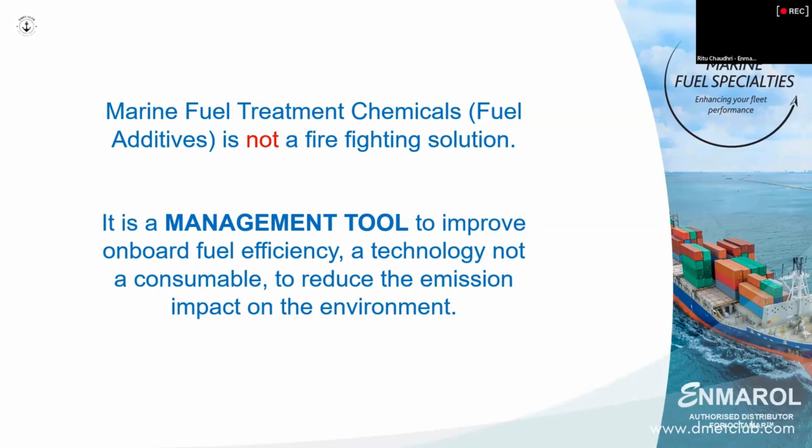Now today we are going to be speaking very clearly about VLSFO only. Each bunker, you can actually make a separate presentation on. And in VLSFO today, we also have the concept of B30. B30 means up to 30% of biofuels can be added in VLSFO. So whether you're using VLSFO or B30, the product will cover the issues.

Now, like all bunkers, there are only two issues each bunker has: stability and combustion. So when we started using VLSFO, please see the VLSFO versus the HFO. In HFO, whenever we had a stability issue, it was always asphaltene sludge. Asphaltene sludge means heavy molecule sludge.

But in VLSFO, when you have sludge, you need to identify it, and that is the aim I'm going to try to achieve in this presentation. The aim is: is the sludge asphaltene, that is heavy molecule, or is the sludge distillate from the middle distillate, because VLSFO has a very high blend of middle distillate, or is the sludge because of waxing? Your chief engineer must be able to identify this, because each of the three has a different source of addressing. And if the chief engineer understands this, he will actually handle 80% of his stability issue on board.

In VLSFO, we're going to discuss stability - that is asphaltene stability, distillate stability, waxes - and we're going to discuss combustion. If your combustion is good, you will save the environment.

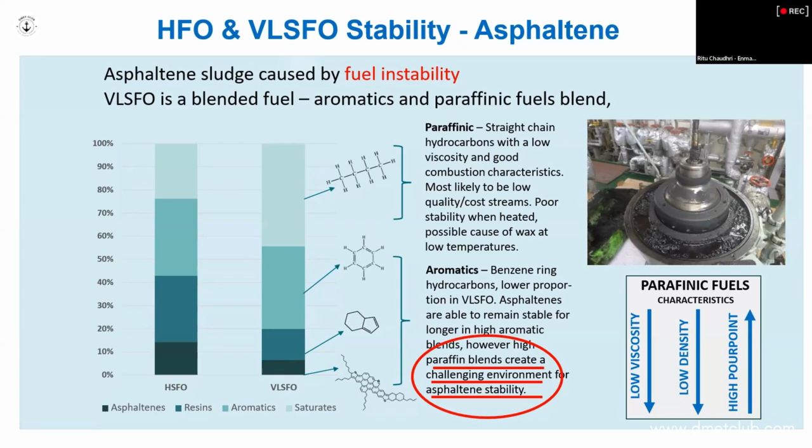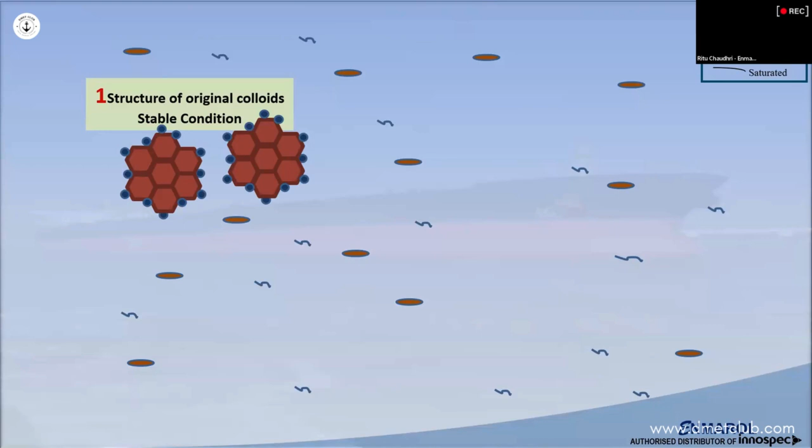So now we go straight to the asphaltenes. What are asphaltenes? Asphaltenes are heavy molecules that are floating around in the fuel. If these asphaltenes are basically polar happy, that means when they see each other, they have a tendency to come together and bounce off.

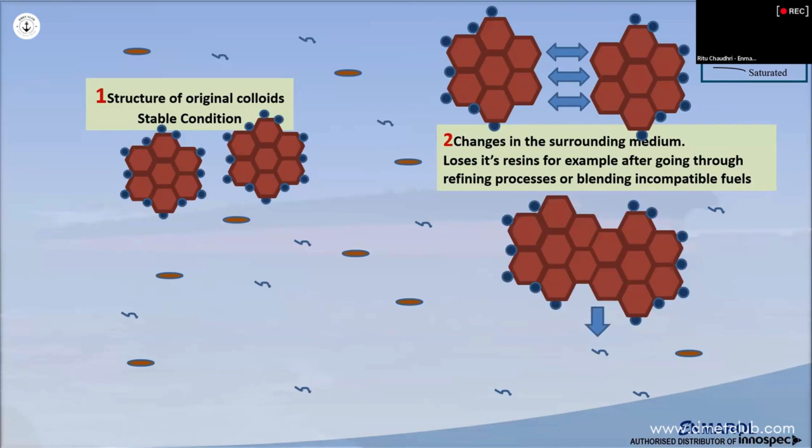But in VLSFO, when we have a higher blend of middle distillates, or the refinery has done excessive processing of the heavy molecules blended in your VLSFO, when they see each other they come together but they don't bounce off. They join, and keep joining, forming larger blobs of things. They sink to the bottom, and that is what your tank bottom sludge is.

So basically, the concept here is that the asphaltene sludge in your VLSFO is not bad fuel. It's just these heavy molecules that have coagulated or clumped together, and because of gravity, they've sunk to the bottom. What does an additive do? Here, the additive plays a very vital role. Irrespective of whether your asphaltene sludge is 1 year old, 1 week old, or even 2 years old, you can treat it. That concept must be very clear - asphaltene sludge is not bad fuel, and it can be treated irrespective of its age.

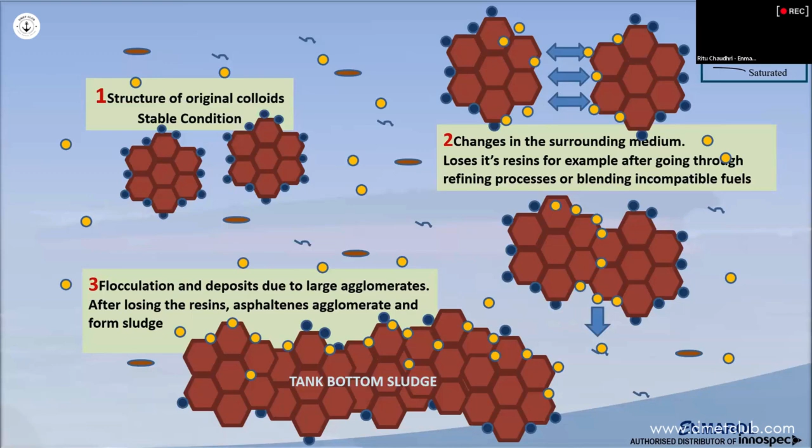So you put the additive in - those yellow dots are the additive. It will mimic and penetrate the sludges, and it will separate them. So asphaltene sludge can be treated irrespective of the age, and the fuel can be burned safely.

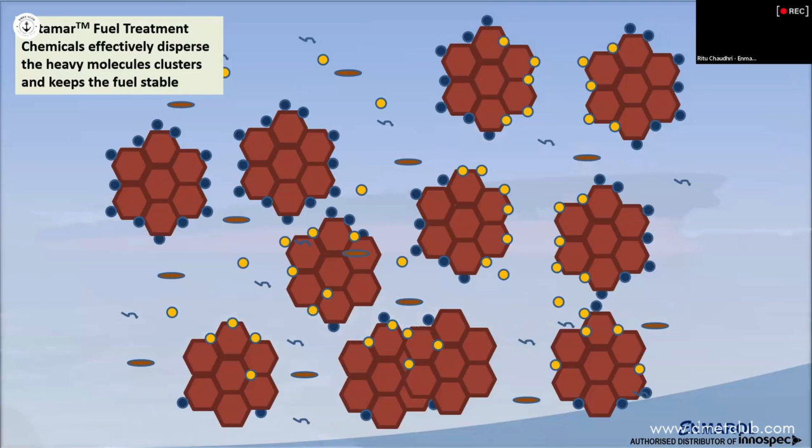Now, how do I know that my asphaltenes are stable? There's a test called RSN, or separability number, which tells you whether your asphaltenes are stable. This is a very important test, and most of our customers in India, as a practice, do it for all their bunkers. It is not part of your ISO 8217, so you have to request for this test to be done.

This test gives you a number, and this number has to be less than 5. If this number is less than 5, that tells you that my asphaltenes are stable. So if you're having sludge in your purifier and your RSN is stable, you know that is not asphaltene sludge. It may be distillate or it may be waxes.

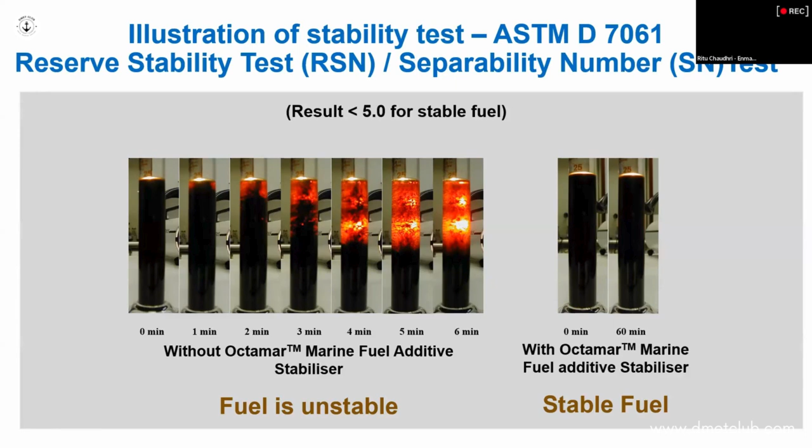Because if your RSN is, say, 3, and you say okay, it's below 5 so it's stable, but if you keep your fuel for 1 month, 2 months, 2 weeks, 3 weeks, 5 weeks, that RSN will keep increasing. Your 3 will become 3.2, 3.5, 4. So the question is that after 2 months you may get sludge. So please, we tell people, asphaltene sludge, asphaltene molecules can be kept stable and treated irrespective, and burned safely.

Please see this. We have a VLSFO batch over here which has got a 10.8 RSN. That means totally unstable fuel. And you can see the other one, you got 3.95. Now the 3.95 over a period of 2, 3, 4, 5 weeks will cross 5.

So you don't need to wait for that instability to come. Treat it at the time of taking bunker. Please see both the things, the beakers are given. You'll notice that the second beaker, after treating, how smooth. You can see the RSN have come down drastically and the fuel has been stable. This is the power of a good additive.

So if your fuel is stable, remember one thing, it will burn better. Why will it burn better? Unstable fuel or heavy molecules tend to clog the small nozzles, your injector tips get clogged by these heavy molecule clogs, and your atomization gets skewed. So if you've got a well stabilized, stable dispersed fuel, you'll notice that your injectors are not getting clogged and the atomization is very good.

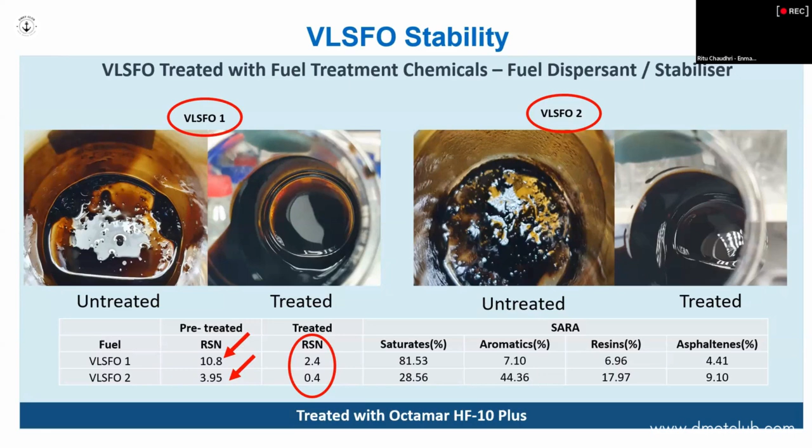So this is the power. It will keep the fuel stable and ensure that the atomization is also good, and that is how your combustion will also improve. Good atomization directly impacts, directly relates to good combustion.

The other thing we've noticed is people say, I let the last 5% of bunker remain in my tank because you cannot drain out all your storage tanks.

So if your chief engineer is taking fuel on board, he must ensure there's not more than 30 CST difference between the 5% tank bottom bunker and the new bunker. If he has more than that, there's a good chance that 5% tank bottom may create instability in the new fresh stable fuel. So don't wait for instability, treat the bunker upfront.

Another thing we noticed is low viscosity. We've noticed that low viscosity VLSFO, meaning anything below 80 CST, has created instability. This is very important. If your bunker report says your viscosity is below 80 CST, there's a high possibility your fuel will become unstable very soon. So please keep this in mind. Below 80 is a very good marker we've concluded on over the last 4 years. Below 80, please get the RSN done, or ensure that you've treated the fuel.

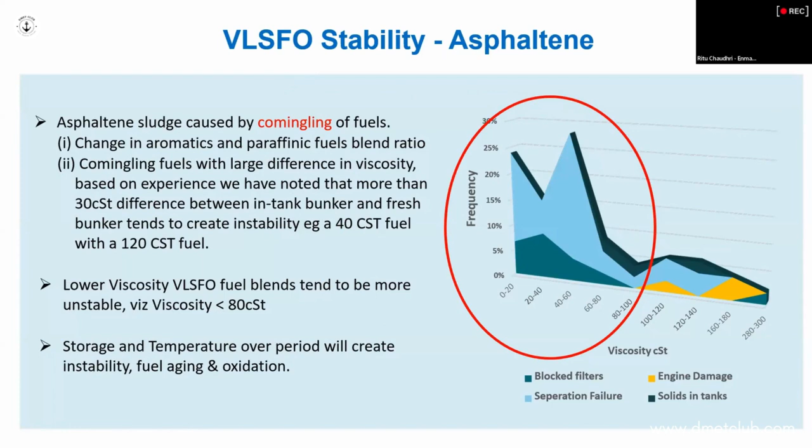The other thing we noticed is even low density, because paraffins have low viscosity and low density. So even if your density is below 940, you will have an instability issue and your fuel will turn unstable. These are very good markers: density below 940 and viscosity below 80 of VLSFO will give you a situation of fuel instability.

So going forward in VLSFO stability, please look at the commingling not being more than 30 CST, and the viscosity not below 80. Unfortunately this appears in 80% of the bunkers people are taking today. So you must treat your bunker to ensure she's stable. If she's stable, she'll burn well, she'll not choke the injector, she'll have better atomization and better combustion.

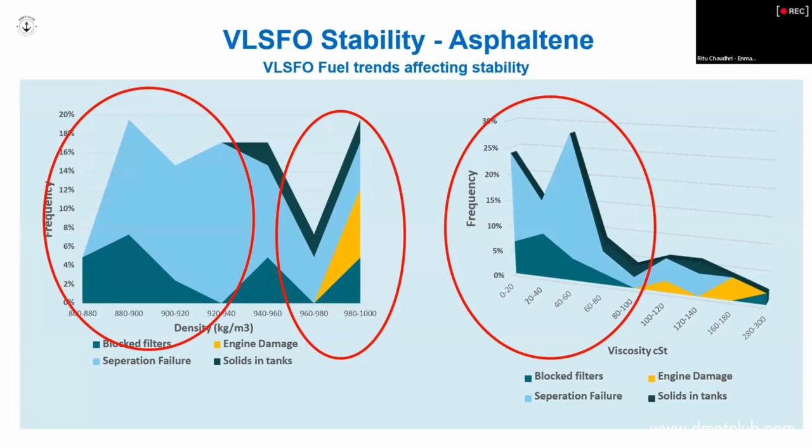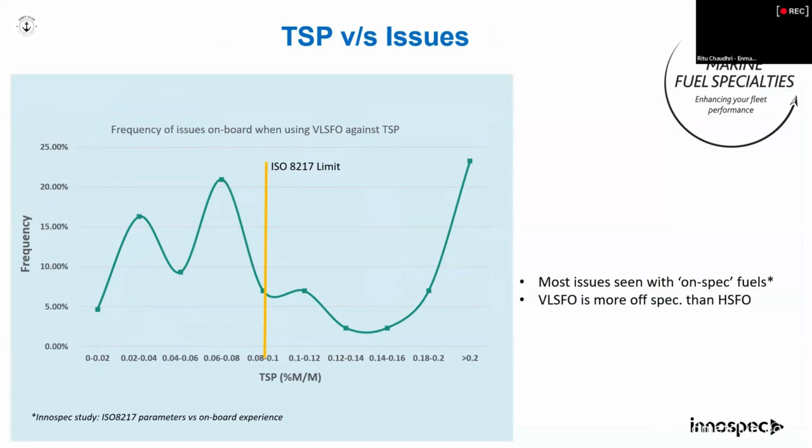So this is on the asphaltene sludge we're talking about. A lot of people say my TSP is fine, so why should I worry? TSP is not a good indicator in VLSFO stability. We've noticed that when the VLSFO is unstable, the TSP is good in those bunkers, but where the TSP is not good, those bunkers are actually stable. So TSP is a very good indicator for HFO, but in VLSFO it turns misleading. So in VLSFO we tell people, look at the viscosity, look at the density, look at the pour point, and please treat. TSP is slightly misleading for VLSFO bunkers.

So we've addressed distillates, we've addressed your asphaltene sludge. Now going to distillate sludge. Distillate sludge is not found in HFO, it's only found in VLSFO. It comes from the middle distillates, the high content of middle distillate in VLSFO. So now let's talk about MGO, which is a pure middle distillate first.

When you took MGO on board, she was light lemon yellow. But over time, meaning over 4-5 weeks, the light lemon yellow would turn dark yellow and then light brown. Basically MGO by character oxidizes in storage. If you kept her for like 6 months, she would turn even very dark brown. Unfortunately, if your MGO is aging, you cannot see it in VLSFO because VLSFO is a dark colored fuel. Because of that, you do not know whether your fresh bunkers have aged distillates or not, and aged distillates are unstable. So in your bunker, your viscosity may be low, your density may be low, your pour point may be high, but your distillate instability is not known.

And there's no test. For asphaltene, we have RSN. For distillate, there's no test. So what do people say?

You know, Ritu, I had fuel, I had sludge, and I heated it because in HFO that's what we used to do. If we had sludge in HFO, we would heat and the sludge would vanish. He said, now when I'm heating, the sludge is getting more and more generated. That is it. If you overheat VLSFO, it agitates the distillates blend and the fuel will age.

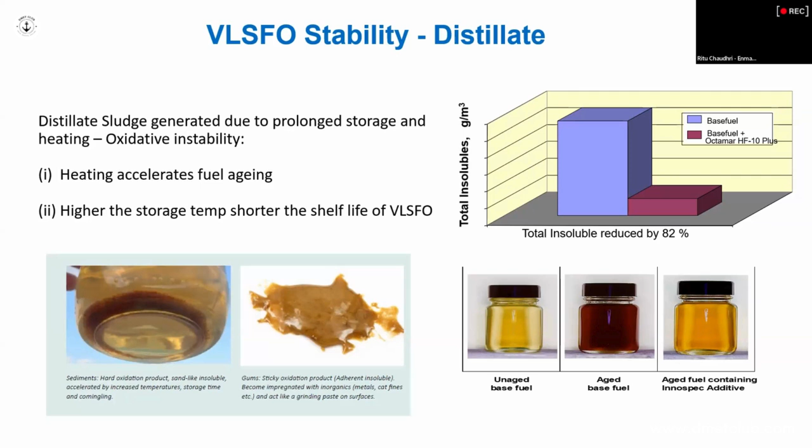So we tell people, please use an additive. Distillate sludge, once created, cannot be treated completely. You will still have clogging in your filters and your purifier. The distillate sludge is something that is to be addressed.

So it is very important to understand overheating is one of the devils that creates instability in your VLSFO, because VLSFO has a large blend of middle distillates, and middle distillates don't like to be heated. We never heat MGO. And the moment you heat middle distillate, it will age. It will create that white gum-like substance, which we can't see because VLSFO is a dark colored fuel, so we cannot see it.

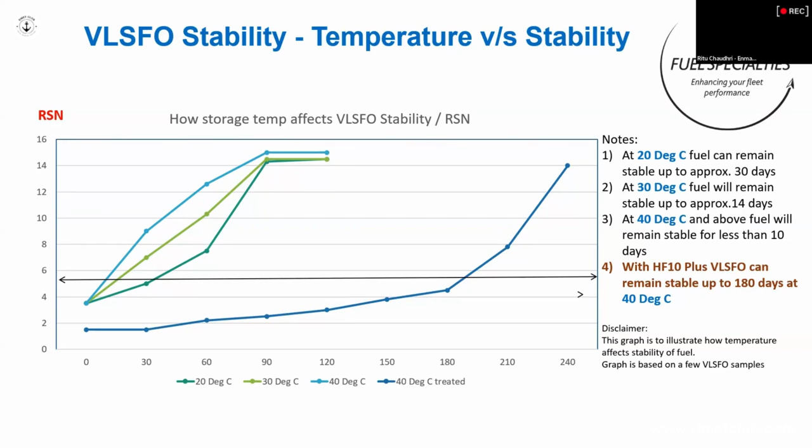So going forward, please ensure that if you have sludge coming out, asphaltene sludge, you can test with RSN. Middle distillate sludge - if you overheat and keep heating the fuel and the sludge is increasing, you know it is distillate sludge. That is the indication of distillate sludge. Keep heating and the sludge increasing, it's distillate sludge.

So in 2020, when VLSFO came out, JSA, Japanese Shipowners' Association, that is where your MOL is coming in, Mr. Mishra - they were very upset that they found VLSFO very unstable compared to HFO, and they approached Class NK saying please find out. So Class NK scanned the entire market, whether it be Nico Yuka, their brotherhood thing, whether it be Adorco, whether it be Drew, whether it be Infinium - they scanned the entire market, and they came to a conclusion that there's only one product in the world that addresses 98% of the instability of VLSFO. This is a test done by them, and this is something they shared. They did this in January 2021.

So they did a very extensive test. And if you go to the Class NK website, only our product appears. They said it is marked.

And the reason our technology is so good is because we are among the top 3 refinery chemical suppliers in the world for fuel treatment. We are very strong. We manufacture, we develop all our products ourselves, we manufacture all our products ourselves, and we sell all our products ourselves. So because we have very deep research, R&D and technology, we were able to give the right product for VLSFO.

And I think we were the first company to launch a VLSFO product in 2019, because a lot of our customers were testing. But this is the power of a good dispersion stabilizer.

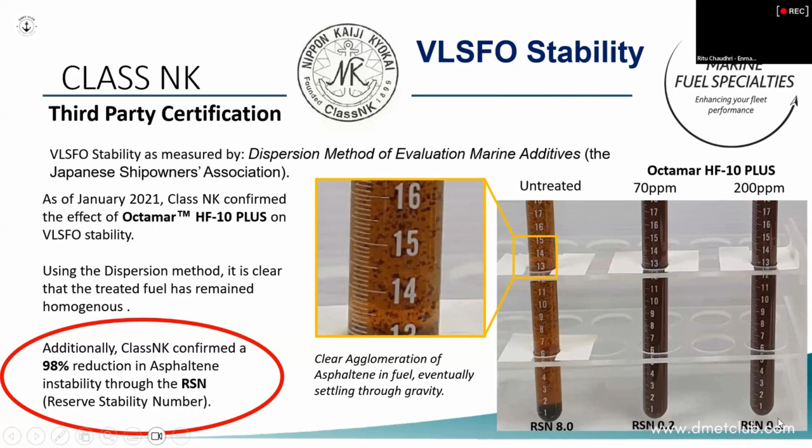You can see the RSN is 8, and with the treatment, it's gone to 0.2 and 0.1. This is the power of a good dispersion stabilizer. So basically, in this VLSFO stability, I've just summarized the whole thing, what I've spoken right now.

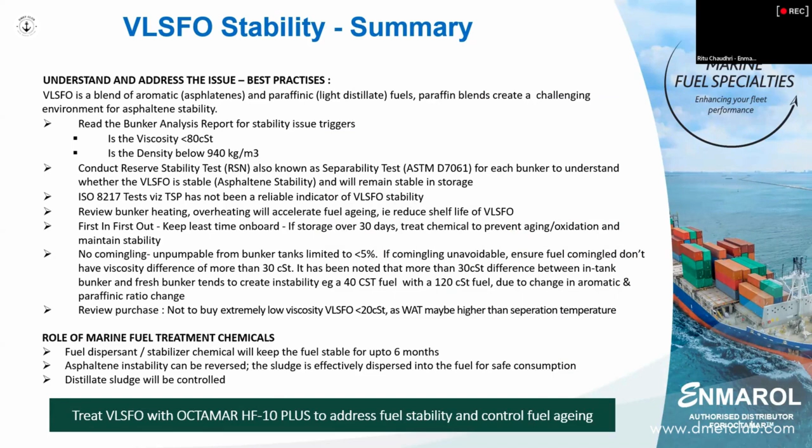If your VLSFO has low viscosity and low density, you will have an instability issue. You must ensure your co-mingling is not more than 30 CST apart, and you cannot help it—80% of the bunkers have these issues, so you need to treat it. Most importantly, don't use the stabilizer as firefighting. Don't wait, it costs less than $1 to treat. Please treat her upfront when you're taking the bunker.

So we have asphaltene sludge, we have distillate sludge, which we covered. Now we're coming to waxing.

VLSFO, if VLSFO has pour point above 20 degrees, or density below 940, or viscosity below 80 CST, she will wax. She will 100% wax. The thumb rule of storing her 10 degrees over the pour point, which everybody follows—this is standard what we followed for all your HFO—does not hold true. Because the WAT, wax appearing temperature, when your VLSFO has 80 CST low, 940 density and lower, or pour point 20 degrees high, the WAT is 15 to 30 degrees over the pour point. So if your pour point is 21, you are heating the fuel at 31, your transfer temperature is 31 as per your analysis report. She's actually waxing, and wax crystals keep forming, and the concentration will keep increasing over the storage period.

So again, people say, P1 I had no waxing, how in P2? Because when you started using P2 after 4, 5, or 6 weeks, the wax crystals are so much in it that she will wax.

And the beauty about waxing is she clogs the purifier. Your filters come out clean. So if you have waxes or clogging in your purifier, your filters are coming out clean—you don't need to think, no rocket science, it is waxing. It is not asphaltene or distillate instability. It is waxing because the wax crystal gets pushed through the filter due to the inline pressure in the pipeline, but at the purifier, they get clogged.

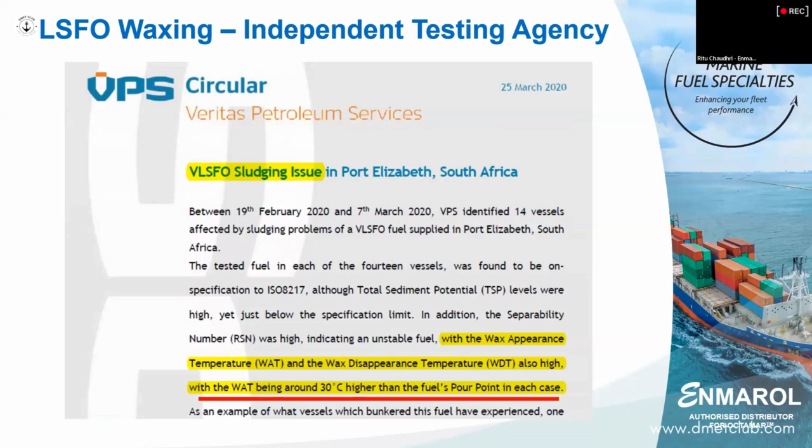So the thing is, there is no additive that can treat waxing. Please be sure, there's no additive. If you tell me that you want a pour-point depressant, no—there's no pour-point depressant for VLSFO. A pour-point depressant will work if you know the origin of the crude. Pour-point depressant works best when the origin of the crude is known. So if you pick up the bunker from Singapore, Rotterdam, India, Houston, Kobe, or Australia, you don't know this thing. So the question is that pour-point depressant only works for 10%, 15%, or 20% of the fuel, not for the 100%. Like for MGO, we have a pour point—irrespective of where you take the MGO, we will ensure that the pour point reduces or the CFPP reduces by 10 to 15 degrees. So the best way to address waxing is heating.

Heat her 2 to 3 degrees over the WAT, that's the best solution. Then when you heat her, she will age—that is where the additive comes in, that is where your dispersion stabilizer comes in. She will control the fuel aging. So for waxing, you have to heat. When you heat, the fuel will age, and that is where the additive will play a vital role to control the fuel aging. So in stability, we have distillate sludge, we have asphaltene sludge, and we have waxing.

Now we're coming to the last one, which is called combustion. A lot of people say that when we burn VLSFO, we get deposits between our piston rings. So from the 40 TBN cylinder lube oil, we go to 70. That's because the 40 TBN has less detergency, so it's not able to remove the unburned fuel deposits on the piston. Then we go to 70 TBN cylinder lube oil, but then we get calcium carbonate deposits because the calcium content is very high. Then again, after 2 to 4 weeks, I come back to 40 TBN.

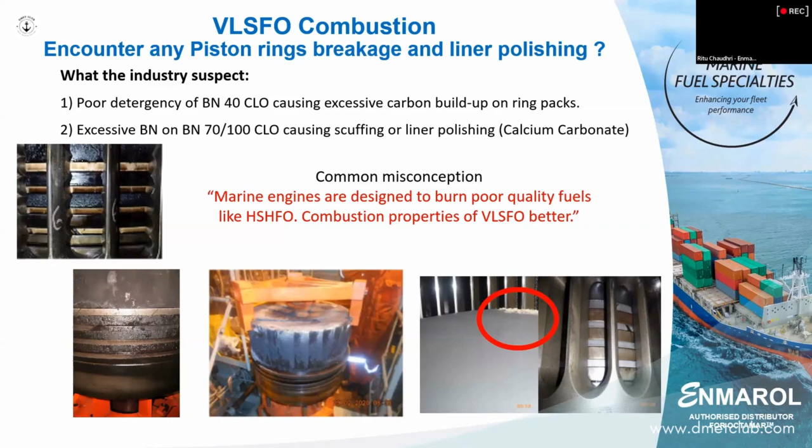No, this is related to combustion. So if you want to treat combustion, you don't only need a dispersive stabilizer, but you need a combustion catalyst. Please see the next slide.

The next slide clearly shows this is from 2020, by an oil major, Exxon. In July 2020, he made a comment saying CCAI is not a good indicator of combustion, because in HFO, if your CCAI was good, the combustion was good. In VLSFO, it's not. He says CCAI is basically a calculation of viscosity and density. So when selling VLSFO, they're looking at one parameter only, and that parameter is sulfur.

They're not interested in what kind of middle distillate they're blending, what the heat value or gross value of the middle distillate is, or whether the middle distillate is waste from a refinery, the tanning industry, the detergent industry, or the cosmetic industry. They're just blending it to match 0.5% sulfur.

So they said that even if the CCAI is good, the fuel may not burn properly, and you will have issues with your piston rings, and your piston rings may break. This is something stated by an oil major, and this was in 2020 when we started seeing this issue occurring across many vessels using VLSFO.

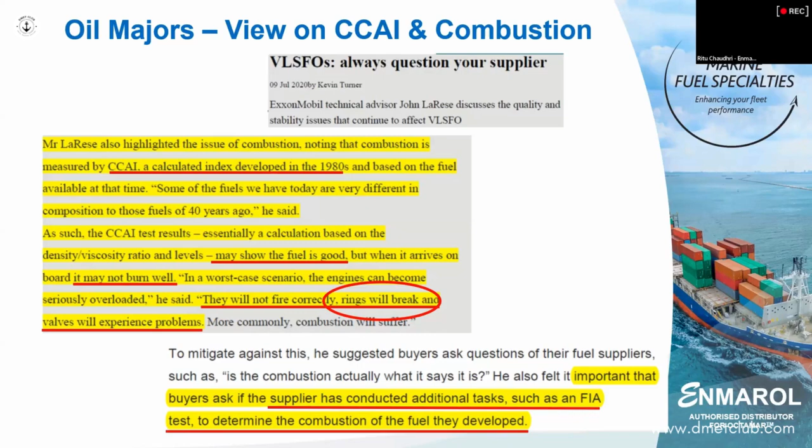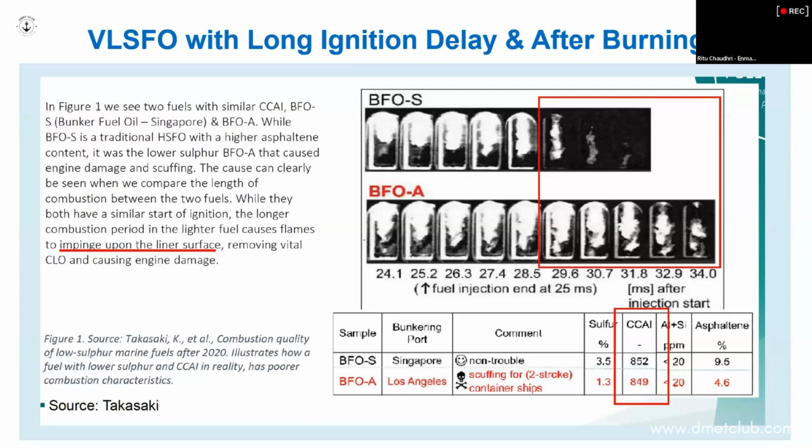So it's not detergency in your cylinder oil that requires jumping from 40 to 70 or 40 to 100 TBN, because at the higher TBN you get calcium carbonate deposits. Understand, VLSFO has a longer afterburn.

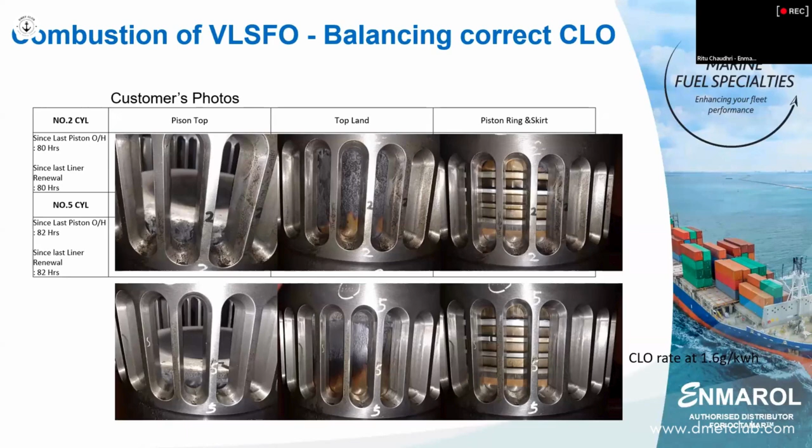Okay, these are photographs shared by some customers. You can see the deposits and the calcium carbonate deposits. This is a photograph again shared by one customer. You can see 1 month after cleaning how the fuel burned, and then 2 months after using a combustion catalyst.

Just remember, you cannot use a combustion catalyst only. You have to use it with the dispersant stabilizer and a combustion catalyst. This is the power of a combustion catalyst. Right from your injectors to your turbochargers, to your waste heat recovery system, and if you're using HFO in your scrubber, everything comes out clean.

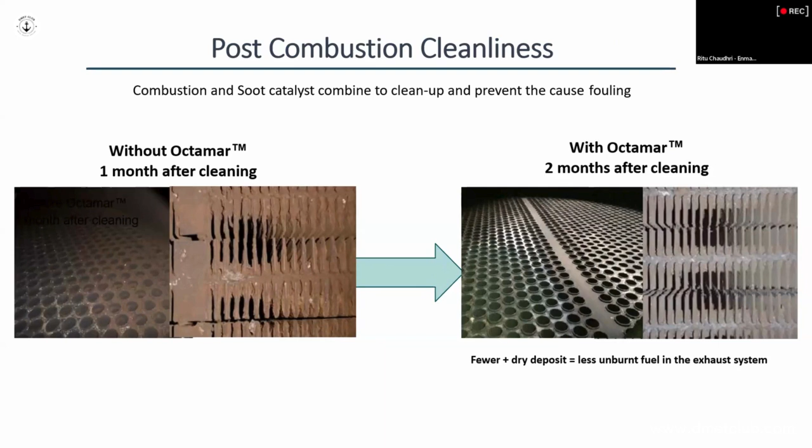So this is it, and you don't need to worry about it. It's all visible, it's all calculated, and it's all monitored on both vessels. So the basic summary is that you don't need to move from 40 to 100 or 40 to 70 TBN cylinder oil. You can just use a good combustion catalyst and protect your engine. If your combustion is good, your engine comes out totally clean.

If your combustion is good, you will save 2 to 4%. I will also show you how you'll be saving that 2 to 4% fuel. This is the power of good combustion. And when you save 2 to 4%, you are actually minimizing the environmental impact of your vessels, in light of the CII, EU ETS, and now the Mediterranean ECA that is coming up next year. It's already come this year, but it's going to be implemented next year. The other thing I want to draw your attention to is, of course, stability and combustion.

Look at TAN. TAN, as per ISO 8217 specification, is 2.5. We have seen 80-90% of the time, if your TAN is above 0.8, within the 2.5 limit, you will have a chemical contaminant. You will 100% have a chemical contaminant, and it can be phenol, styrene, cyclopentadiene, chloride, or other things. Please remember in 2018 when we had the Houston bunker issue, all the TAN in those bunkers were within 2.5 but above 0.8.

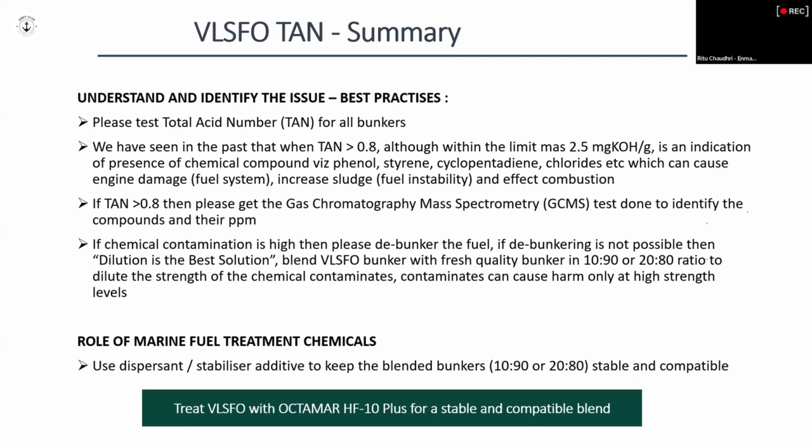They created issues across maybe 300-400 vessels. It was drastic. So we tell people, in your bunker report, if your TAN is above 0.8 but within the 2.5 limit, please get the GCMS test done, because there's an 80% chance you have a chemical contaminant. Whether phenol causes acid corrosion, styrene will stick, cyclopentadiene will create excessive instability, chlorides will have combustion issues - each has its own effect. So please, this is very important.

I put the TAN in. The next slide is the most important - I've summarized it. You may have a stability issue if your viscosity is low, in your ROB below 80, or density is low. Please get the RSN test done to ensure whether your asphaltenes are stable, or you must use a good stabilizer dispersant - I mentioned our products below.

You will have a waxing issue if your viscosity is below 80, density below 940, or pour point above 20. Please get the WAT done so your chief engineer knows the correct temperature. Sometimes people say, my WAT is 50 and I'm carrying grains, I can't heat, what do I do? I said you need to blend her with other bunker where the pour point is very low to bring down the WAT.

So you say we can't blend, we have a policy not to blend. HF-10 Plus has proven over and over again that you can blend 20%, 30%, even up to 100%, and she'll keep both the bunker blend stable. That is the power of a good dispersant stabilizer.

So you must get the WAT done to avoid waxing. Don't wait, because once the waxing takes place, you have to heat that bunker for 2 to 3 days, or maybe as high as even 10 days sometimes. Unwaxing is a very, very slow process. So don't wait for the problem - read the bunker report and you can identify the problem upfront.

If your TAN is above 0.8 but within the 2.5 limit, there's a possibility you may have a chemical contaminant. Now people say, Ritu, I have a chemical contaminant but my bunker is meeting ISO 8217, what do I do? Then I tell him dilution is the best solution. He says, I can't. I said, no, you have to dilute 10% or 20% of the contaminated bunker with fresh bunker.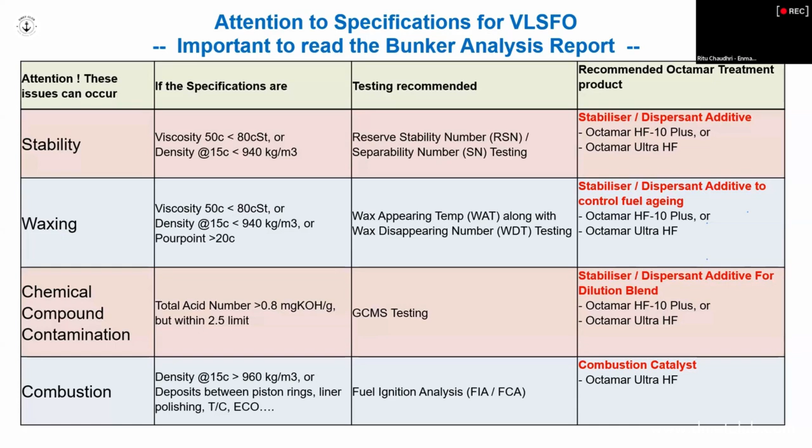Okay, basically these are our products. This is a very good report because a lot of people can't understand how the product is working. Please see that this Ultra HF, which is the combustion catalyst product, has all the components of the stabilizer. So it's not that you have to use two products - the combustion catalyst product comes with the stabilizer, it has all the components. So you don't need two products to use - no, it's a single product. And it's been classified or verified by class NK.

You can even see the HFO product and even our LSMGO product. And we also have basically a combustion catalyst for your MGO, for your middle distillates, because with ECA Mediterranean coming - in India we have a lot of people, a lot of dredgers on the coast of India, a lot of port equipment, a lot of supply vessels using our combustion catalyst product in India to try to make their fleet a green fleet.

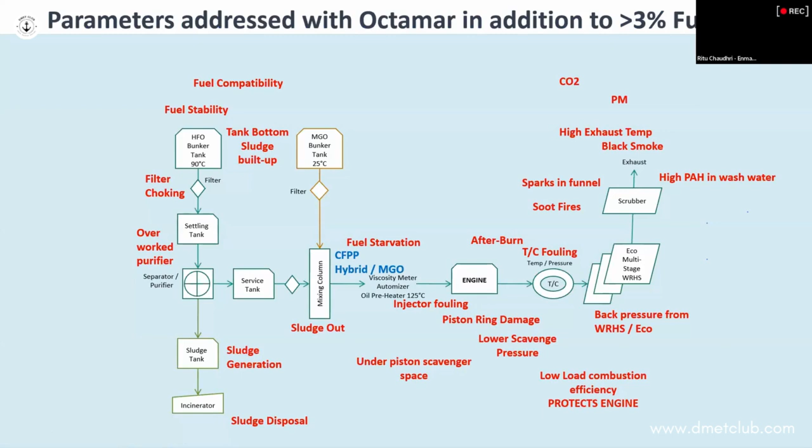Okay, basically this is very simple - right from your tank to your injectors, if your fuel is unstable, these are the issues that will occur. The red items are the issues, and all those red issues are addressed by the additive. Post-injector, all those are combustion related issues. All those issues are addressed by the additive, and all these issues are automatically monitored on board the vessel.

Most important, I'd like to highlight here is this low load combustion efficiency. A lot of people are doing low load - what happens in low load? The engine is not designed to burn the fuel effectively. It's not that the fuel is bad, it's not that the engine is bad - the design is not designed to have the best efficiency.

So when you go to 40 or 35 because you want to save and achieve a CII target, or you want to save fuel, or you want EU ETS and want to reduce your EU allowance - whatever the reason is, when you do low load, because of poor combustion, your engine gets messed up.

Your turbochargers are coming unclean. Your delta T exhaust turbochargers are showing a drop in pressure, drop in temperature. Your manometer reading in your waste recovery system is showing that there's a deposit build-up, and you have to do soot blowing much more because you have back pressure built up.

With the combustion catalyst, you'll notice even at 35%, your turbocharger delta T, delta P are coming out clear. Your injectors are coming out clear. Your waste recovery systems are coming out clear. And if you have a scrubber on board the vessel, the PAH in your wash water - that's your polycyclic aromatic hydrocarbon - drops by 25 to 30%. And you'll notice that the opacity of your smoke is coming out clear.

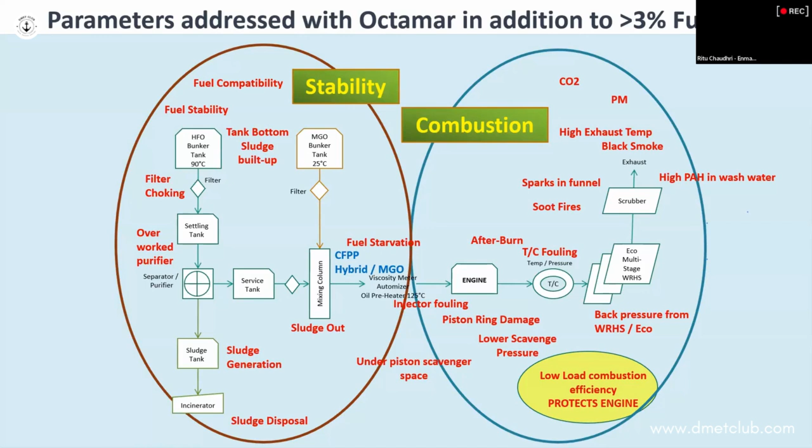I want to very briefly touch on biofuel, just 4 slides. Basically you have got B30 - I'm not talking about B100, B100 is a totally different solution, I don't want to cover B100 in this. B30 - when you're using B30, just remember you have a very high blend of a middle distillate which is coming from a natural source, a vegetable natural source. And that over time will create a very high amount of instability.

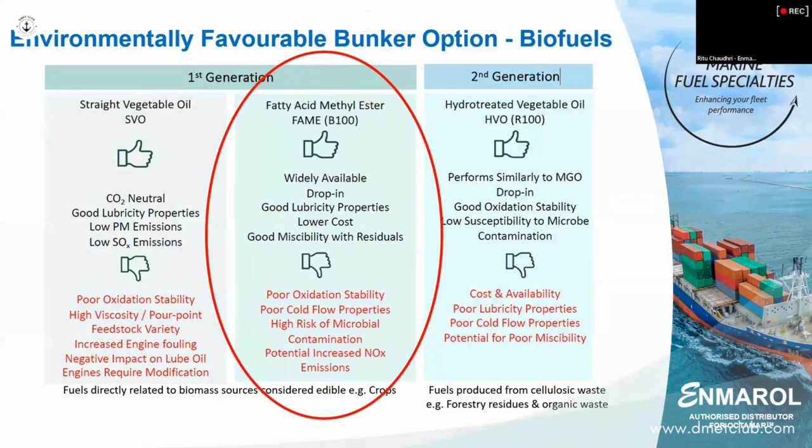So when people are using B30, a lot of our customers are using B30 VLSFO, they all are using the dispersant stabilizer at double dosage because the instability is coming out at a very high level. So basically if you're using B30, you need to notice that your heating, your handling, your engine - because you'll have fouling - are monitored on a very regular basis.

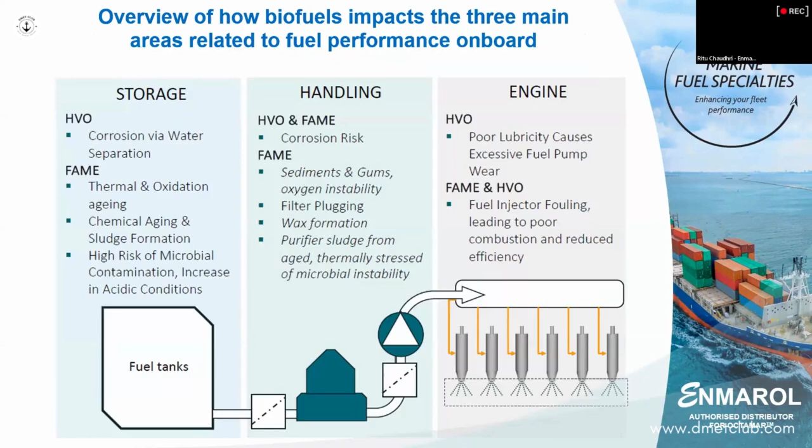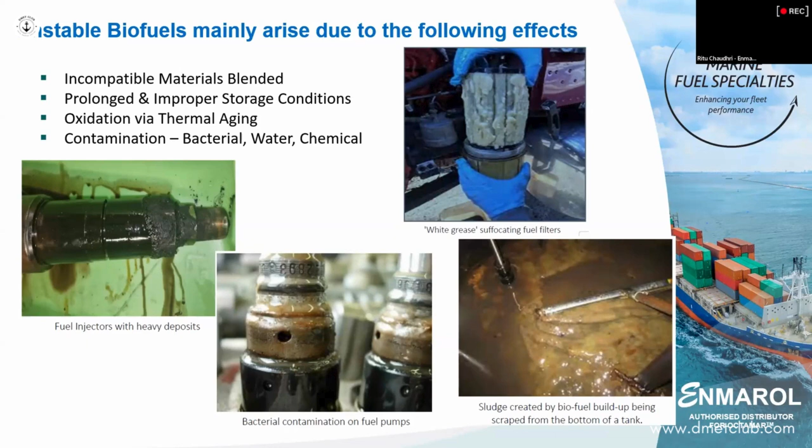These are issues from MGO, which for the last 20 years our customers have been sharing. You can see how B30 of MGO or B100 of MGO can affect things. You don't want a situation occurring like this. The higher blend of B30, because it's from a natural source, if you don't do good housekeeping of the tank bottom water being drained between the interface of your water and oil, you will start having bacteria contaminants, and you don't want that. So your housekeeping, your heating, your handling with B30 should be more attentive than a VLSFO situation.

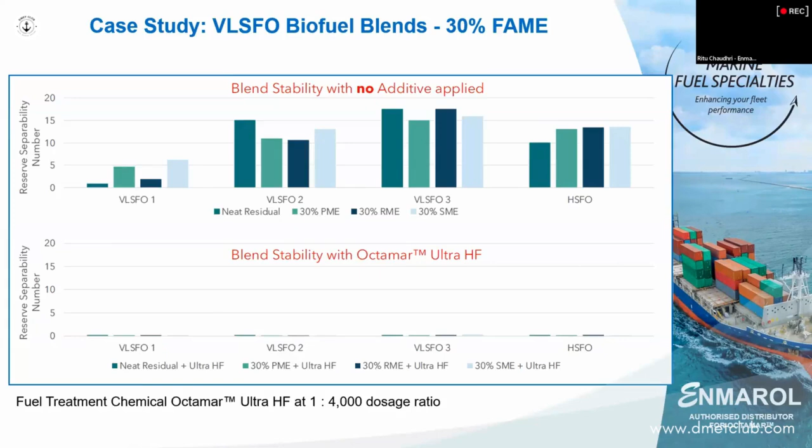Another thing we noticed, this is from our automotive background, because in automotive diesel we are number one in the world, and that is how our technology in shipping is coming. We've noticed that when people are using B30 to B100 continuously in large earth moving equipment or in small river boats - a lot of the river cruises in Europe are using B100 and B30 with an additive - if they don't use an additive for like 6 or 9 months, because of gradual deposit build-up, their engine performance comes down. They have clogging of injectors, build-ups in the filters, the fuel doesn't burn, and they have power loss. The moment you put a combustion catalyst, it goes back to full power. This is our technology.

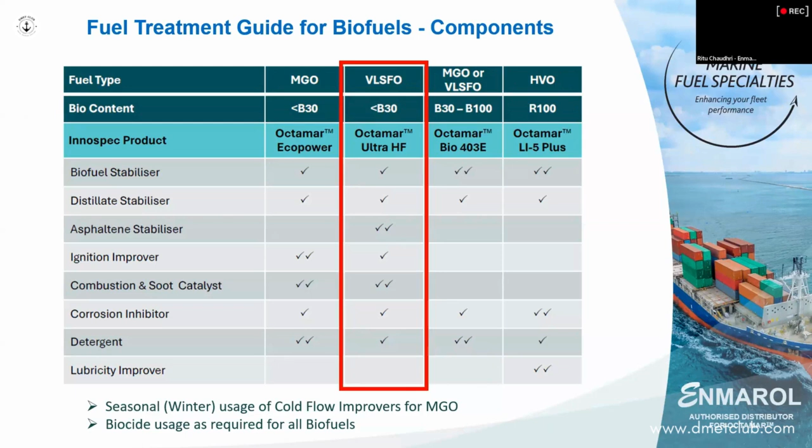This is our background with automotive, small boats, and heavy earth moving equipment, which we are bringing into marine, because marine will start using B30 to B100 on a continuous basis now, whether ships are visiting ECA or non-ECA areas, because of CII, EU ETS, and now Mediterranean ECA. So in the next slide, I've highlighted that if you're using a VLSFO B30, I would recommend not only a stabilizer disperser, but also a combustion catalyst to ensure your B30 remains stable and burns beautifully without any effect on the engine. The cost of these additives - a dispersion stabilizer costs $1, or a combustion catalyst with dispersion stabilizer costs about $2.50. The cost is negligible. It allows the engineer to run the engine without continuously cleaning and doing repair and maintenance. This is the power of the additive where biofuels are concerned.

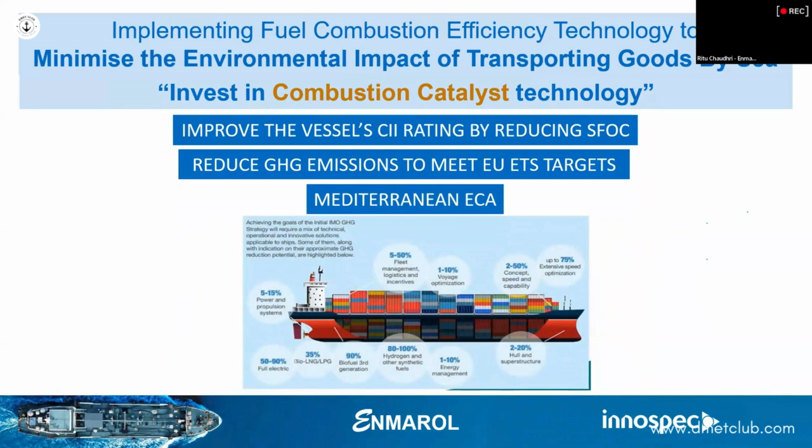Now we come to the last section. I'm going to emphasize the combustion catalyst technology, because she will allow your vessels to achieve a CII rating by reducing your fuel consumption by 2 to 4%. She will reduce your greenhouse gases to meet your EU ETS targets and reduce your EU allowances. And now, if your vessels are going to the Mediterranean, which is going to become ECA from 1st May 2025, your combustion catalyst will allow you to become more environmentally friendly. This is something I've taken from DNV.

DNV has identified different decarbonization technologies you can use, and in the green part they've given guidance on savings. But I'm going to talk to you only about the combustion catalyst technology, which saves about 2 to 4%, which I mentioned earlier in your slide.

A lot of people say, fine, combustion catalyst technology, but besides combustion, all the other technologies cost you dollars. You have to take the vessel off hire, put a boss cap or a Mewis duct, put a fan or a paint or something. While with the combustion catalyst, it also costs you dollars.

Combustion catalyst costs you $10,000 to $70,000 a year, depending on the size of the vessel and how much bunker you are consuming. So a lot of people say, I don't want to invest in these technologies because my vessel is 10, 5, or 15 years old. I'll just do low load.

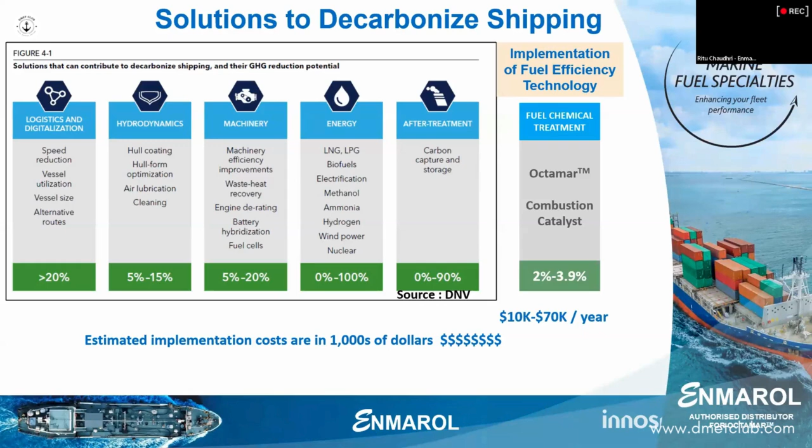So I said, fine. The beauty about the combustion catalyst technology is there is no CAPEX, and the OPEX is very low. You can start Monday morning, stop on Friday. She's environmentally friendly, very good for old vessels. If you don't invest in your old vessels because she's already 10, 12 years old, no problem, put in the combustion catalyst technology.

From E, she may jump to C. Or D, she may jump to C. You will run the vessel your entire life. It's a sustainable technology, and your ROI is instant.

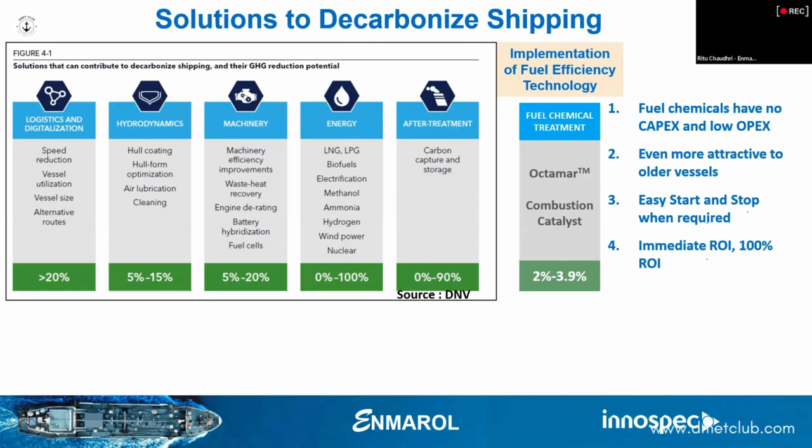She costs you less than 1%, less than 0.5%, but I'm saying less than 1%. Your ROI is instant. It's a sustainable solution, and most important, she's proven.

We have not taken out the combustion catalyst technology today. This combustion catalyst technology is 30 years old. It's a proven technology, used by most of our customers across their vessels. And some people say, okay, I'll just do low load.

So when you do low load, again we come back to this. In low load, your engine suffers the most. So if you're using a combustion catalyst technology at low load, not only is she saving fuel, but she's protecting your engine. Your engine is coming out clean, your turbochargers are coming out clean.

Waste heat recovery systems are clean. You're saving in maintenance, you're saving spare part cost. I had one customer tell me, after 18 months, his spare part injector costs had come down by 90%.

But he still has to change it as per the OEM's guidance, because the OEM will say otherwise your warranty doesn't hold. So he says the injectors have come out totally clear and clean, there's no damage. This is the power of the technology.

Some people say, I will use bio. In biofuels you have to use an additive, because the biofuels being tested now are in small batches. When you go to regular commercial use, the biofuel quality may start reducing.

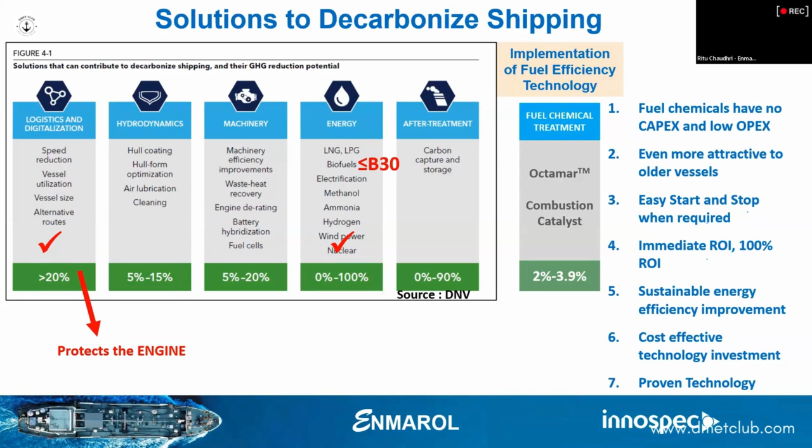So this is what we recommend to people. In VLSFO, please use the combustion catalyst. In HFO, please use the combustion catalyst. And in MGO, please use the combustion catalyst.

You can save fuel by using a dispersant stabilizer only, but that will not give you the full impact. If you want to do CII, EU ETS, Mediterranean regulations, low load, B30, and save money on maintenance and spare part costs, the combustion catalyst is the right way forward.

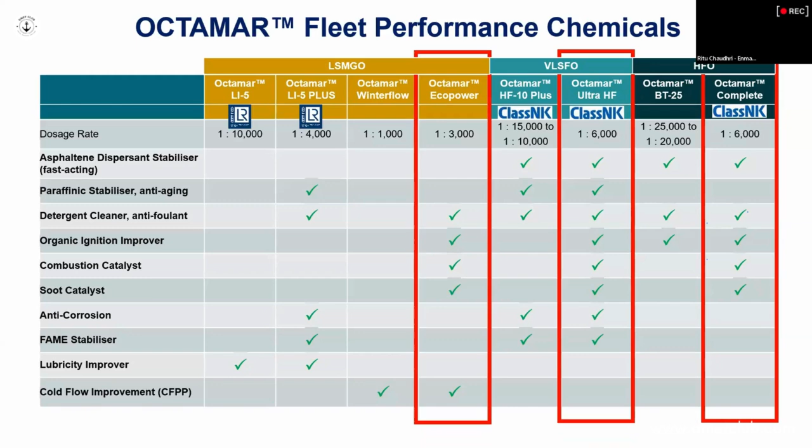The dispersion stabilizer is also a right way forward, but it's more cost effective and doesn't address A to Z. It may address A to P, so basically this is something you'll know better than me.

The additive will take care of pre-combustion issues, combustion issues, and post-combustion issues. You'll get all your purifiers, injectors, waste heat recovery system, and turbochargers all coming out clean.

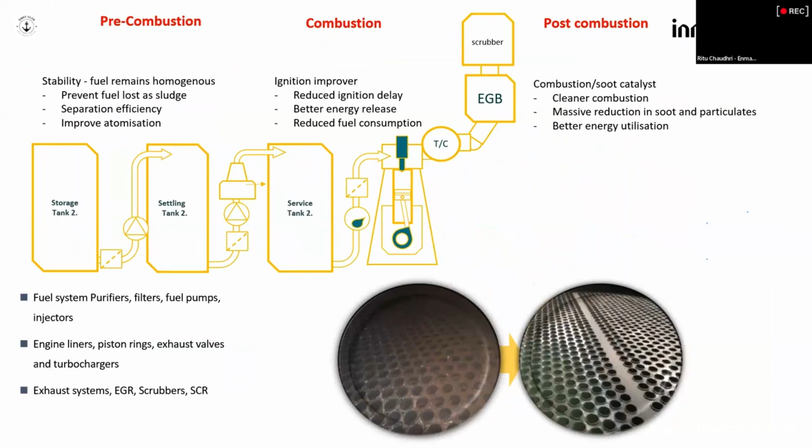So this is basically a very simple technology. It's iron. Iron enters into the combustion chambers and finds oxygen. It becomes ferric oxide, and the ferric oxide acts like an oxygen donor to carbon.

So wherever she sees C, which is your carbon, she converts that C into CO2. It's a very simple technology. We hold a patent on the combustion catalyst. We are actually the only company in the world which has the finest combustion catalyst for marine, and that has been certified by Class NK.

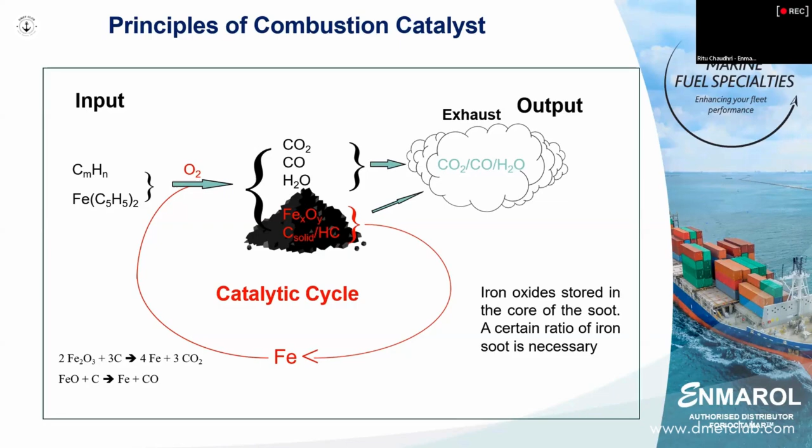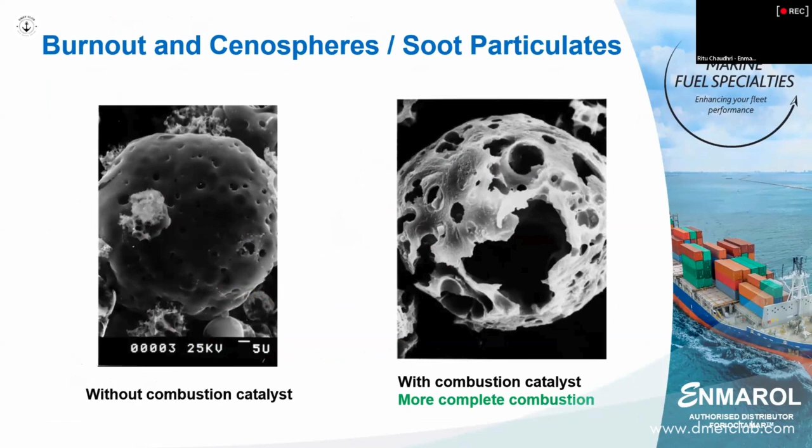I'll show you a certificate in the film. You can see the unburnt cenosphere and the burnt cenosphere. She's 90% burnt out, she's light, she's hollow. This is the power of a good combustion catalyst. You can see pre and post, without the additive and with the additive, which I showed you these shots earlier.

This is a customer of ours in 2016. The reason I took this is to show you that we have customers using this product for the last so many years in India too.

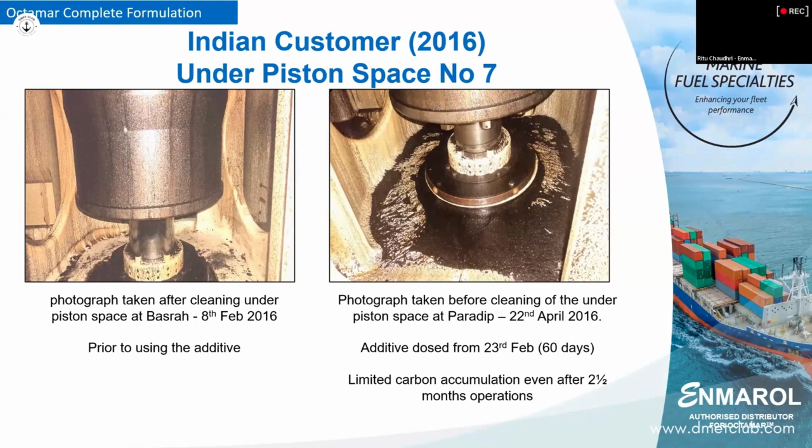This is after cleaning in Basra, the first one. And this is a photograph taken before cleaning at Paradip, after 60 days. You can see the situation is nearly the same. This is the power of a good combustion catalyst. You can see after cleaning in Basra and 60 days before cleaning at Paradip. These are the photographs shared, but you can see there's no difference between after cleaning and before cleaning after 2 months.

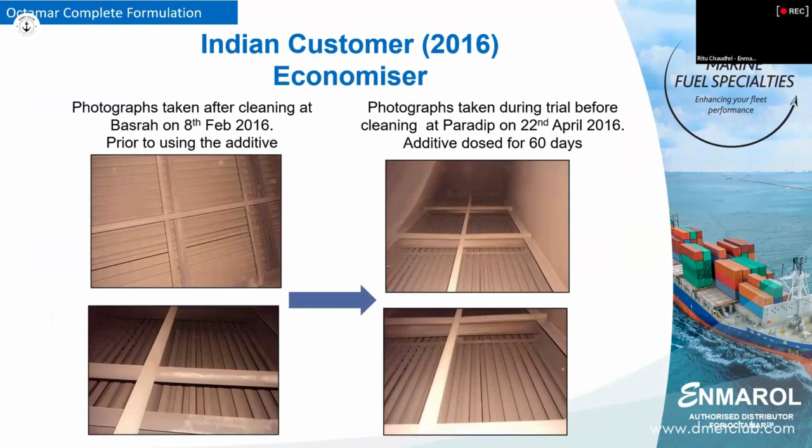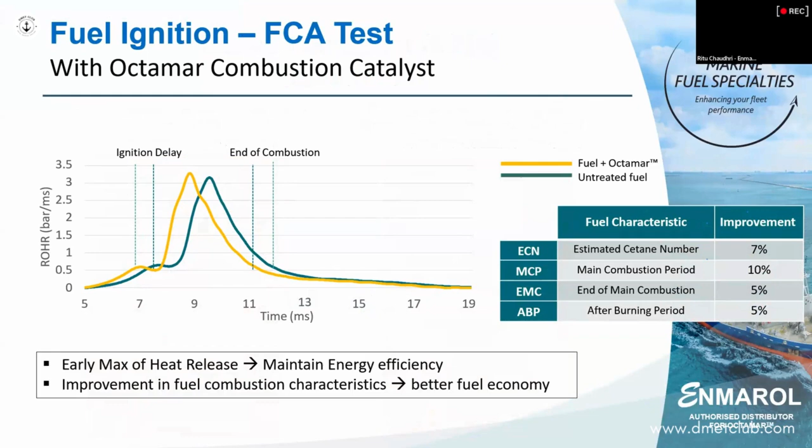So we have done the FCA test, that's a fuel combustion analysis test, with and without our additive. And with our additive, it is seen that the main combustion, the ignition delay, the afterburn period, the cetane, all has improved. So this is what we are saying, that you'll save 2 to 4%. Now, who are the other people saying that you'll save 2 to 4%?

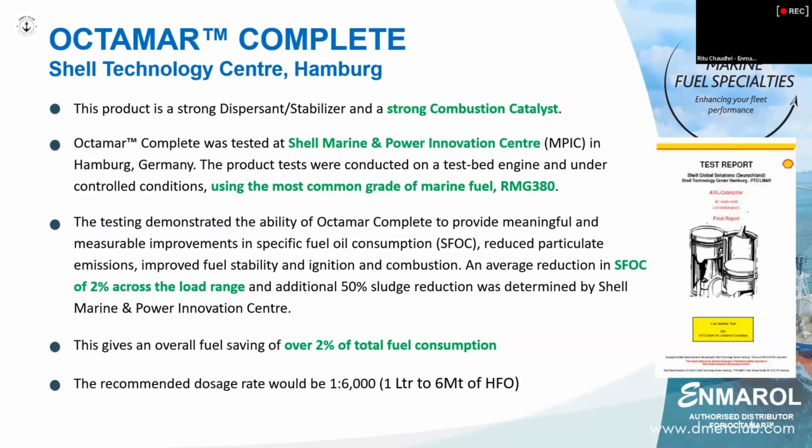This is a test done by Shell, about a 10-year-old test. They have done a test and come to a conclusion that with Octamar, with our combustion catalyst, you save 2%. This test is done in a laboratory, so this is a very clean, clear engine. There's no issue at all with that engine, but they're not taking into account the 1% or 0.5% or 1.5% saving in sludge. So they came to 2%. This is a report that they've given to us, which we share with all our customers who ask for a copy.

And then this is CIMAC paper number 69. Please see, they've been testing our product, the combustion catalyst platform, since 2000. It's a proven technology. The reason they've been testing our product since 2000 is because a lot of inland river boats in Europe are using our combustion catalyst technology because they don't want emission. They were earlier using MGO and middle distillate, now a lot of them are using biofuels. So this is it, and they're even saying that when you use a combination of the combustion catalyst and dispersant, you can get up to 3.9% saving in fuel.

Okay, this is Class NK. When Class NK certified that HF10 Plus was the best combustion, the best fuel stabilizer, VLSFO stabilizer in the world, they started testing our product prior to 1st January 2023, when CII came into play. And they came to a conclusion—no product in the world has this, because we hold the patent for the best combustion—that it's 3.7%. And very nicely they've issued us a letter with the product names mentioned. They've never done this ever in the past for any product except for Nico Yuka, which is their brotherhood company. Go to the website, only our product comes up.

So this is the power of a good combustion catalyst, recognized by CIMAC, by Shell—CIMAC is number 1 in internal combustion—by Class NK, which is a very reputed marine class, and of course Shell Marine is the number 1 marine lab in the world. So this is the power. The 2 to 4% is achievable.

Now I'll show you some of our customers who have started putting our product in the SEEMP Part 3 as a technology to save fuel, and it's been recognized and signed up by most of the classes globally. You can see they put in Octamar Ultra HF with a 2 to 4% reduction in saving. So this is a power. It is no more a consumable, no more a product, no more a fight—it is a technology which a lot of our customers have adopted for saving fuel and keeping their engines clean.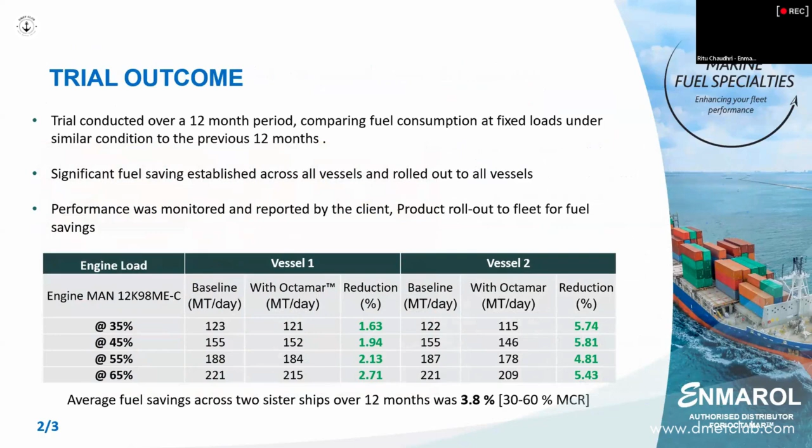So he came to a conclusion that he's getting 3.8% saving across the fleet, I think across 7-8 vessels. He said instantaneously he got 2.7% because the combustion catalyst starts burning from the very first second, so you get fuel saving from the very first second. After 2 months, once the engine is totally cleaned out, the saving will stabilize, and the additive will maintain that clean engine status for the rest.

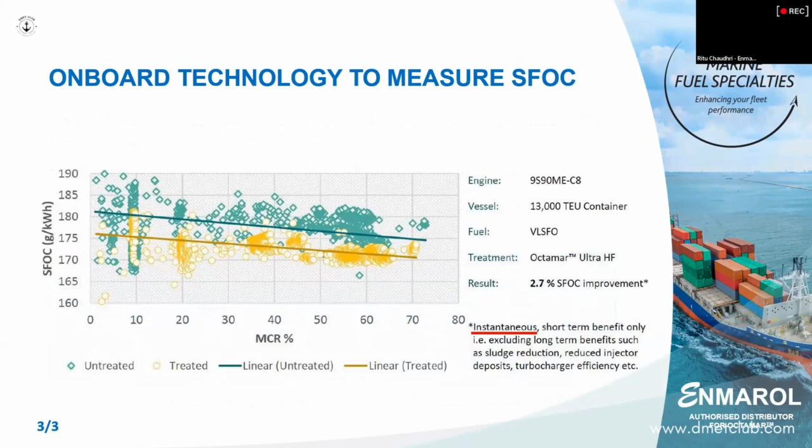This is another customer. He got a third party to do the testing, and he got close to 3%. Another customer did it internally, manually, and they got 2%.

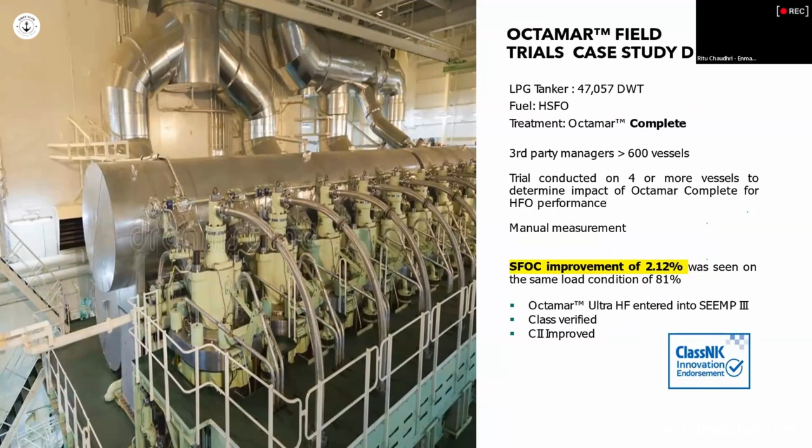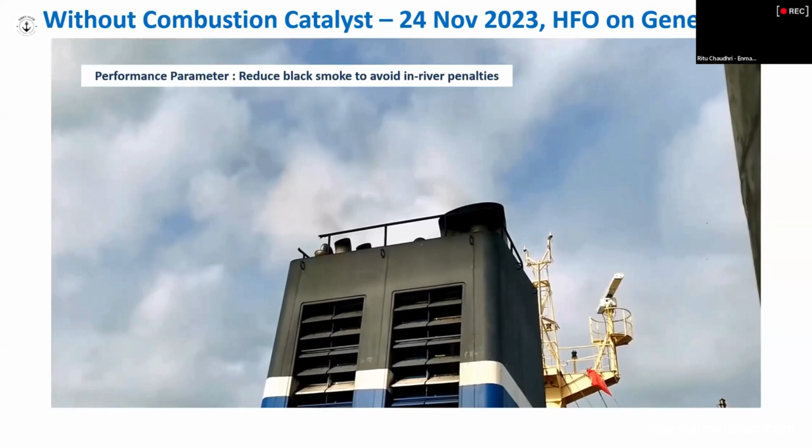This is a very important customer. He didn't want fuel saving. He said, I don't want fuel saving, my vessels go to China and I have a lot of in-river penalties. This is without the additive. You can see the smoke, it's got a dark smoke.

He says now when my vessels enter the China River, they just send a drone and send me the penalty, and the penalties become very high because they keep multiplying. So this is on the 24th of November, then he showed it on the 2nd of December, again the chief engineer took it. That's the first slide, you still got a minor gray smoke.

This is with the additive after 1 week. I told the chief engineer, stop using the HFO generator, please go to your MGO. Same day, same moment, he went to MGO. The combustion of the MGO and the HFO with the additive was the same.

And then after 2 weeks he's taken another shot, it's clear. He says, I have no in-river penalties on any of my vessels visiting China now, and this is what he's doing. This is on HFO, not VLSFO, but the technology is the same for HFO and VLSFO. So this is the power of a good combustion catalyst. He says the amount of penalty I'm saving is just equal to the combustion catalyst I'm buying, but he said with the combustion catalyst, my full engine is coming out clean.

He says, I'm just happy, I'm not looking at fuel saving, I want my engine clean.

So this slide shows that even if you save 2%, you will save 374 metric tons of CO2, and your ship will jump one step up—if she's E, she'll go to D. A lot of our customers have been getting literally 4% and above, but we tell people 2%. If you've got a medium ship using 9,000 metric tons of bunker a year, you will save 560 metric tons. This is the power of a combustion catalyst.

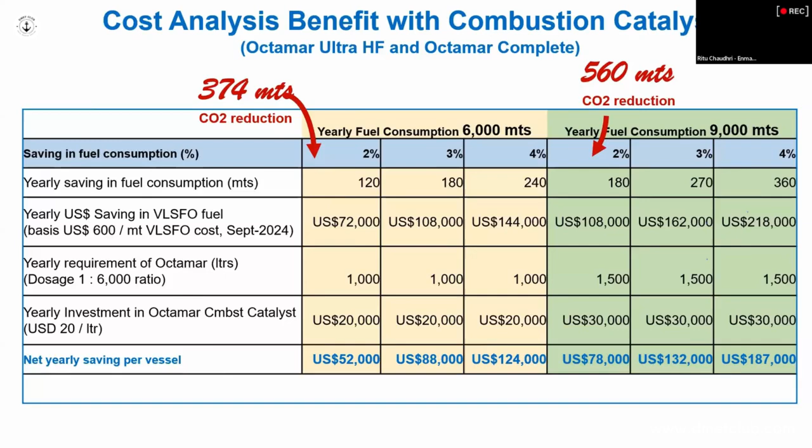It automates savings whether you've got an old vessel or a new vessel—it does not differentiate. A lot of our old customers who have old vessels said we thought we'd run our vessels for 2 years and then scrap her. He said now we're going to run her for 8 to 9 years and scrap at the end of her technical life.

If you're using MGO, use a combustion catalyst. Using VLSFO, use a combustion catalyst. HFO, use a combustion catalyst. B30, use a combustion catalyst. B100, use a combustion catalyst.

So basically, we tell people that this is a management tool. A combustion catalyst is a management tool to improve onboard fuel efficiency. If you tell me you don't have money and you've got budgetary constraints, then you must use a combustion catalyst, because it reduces your fuel consumption, reduces your spare parts, and reduces maintenance. If you have a budget issue, you must use a combustion catalyst, but it saves you money at the end of the day. If you want to improve your CII rating, it's a combustion catalyst. You want to reduce greenhouse gases for EU ETS, combustion catalyst.

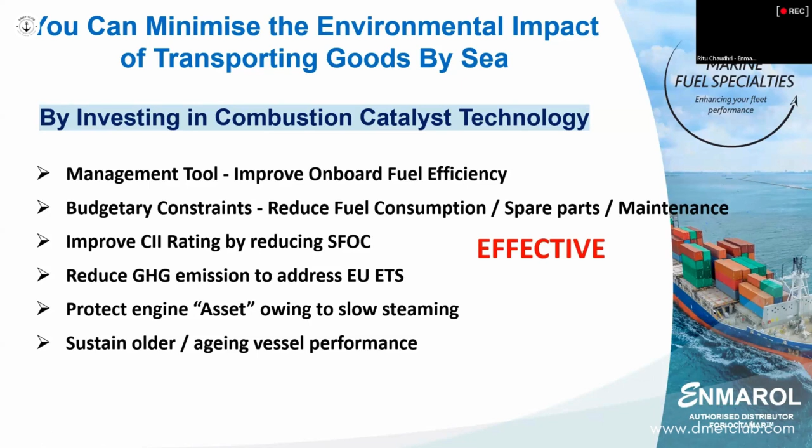If you're doing slow steaming and you want to protect your asset, you must use a combustion catalyst. And if you've got an old vessel, you must use a combustion catalyst. This technology is effective, it is economical, and it is sustainable. It is a very good technology that we recommend.

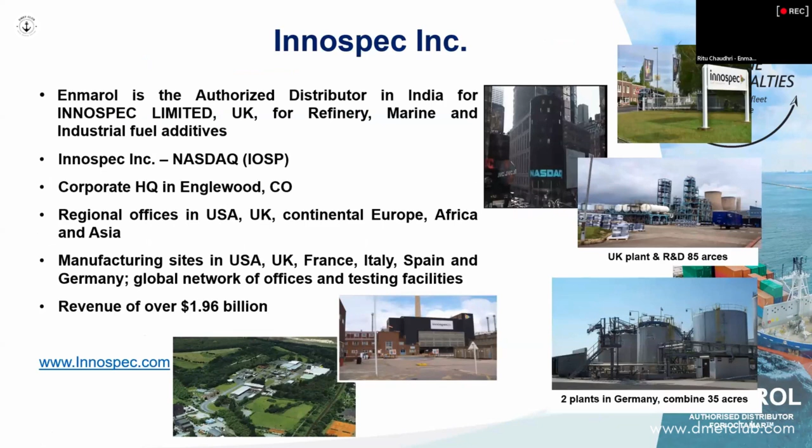So basically, Innospec is a $2 billion company, traded on the NASDAQ. We are the only fuel additive company in the world which is traded on the NASDAQ, and the only fuel additive company that makes fuel right from the drilling of the fuel to the end.

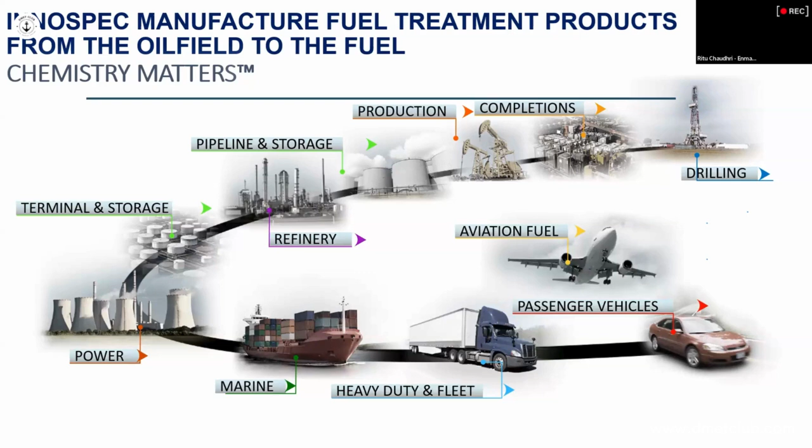In aviation, we are single vendors. Any plane you fly in the world has to have a conductivity improver, and there's only one company which supplies to all the planes in the world - that is Innospec. This is part of our technology, and we just looked at marine.

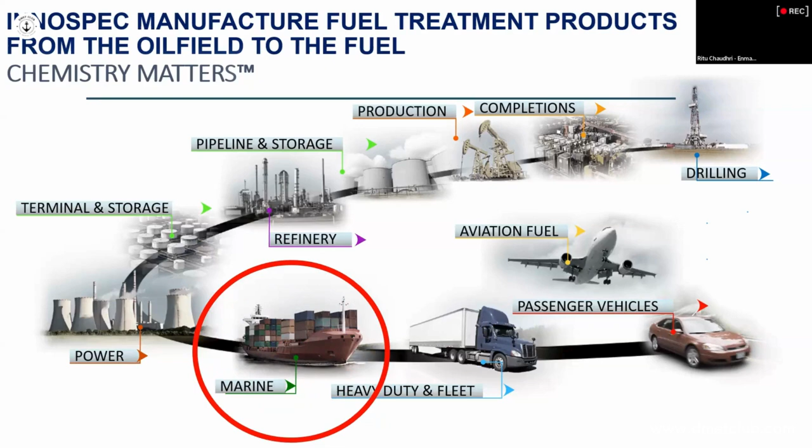And in marine, we only looked at one bunker, VLSFO. This is part of our business because we are among the top 3 additive companies in the world. We take out the technology prior to the fuel being launched or the fuel specification being changed. Because of our in-depth technology, one third of the fuel in the world is treated by us. This is the power of our technology.

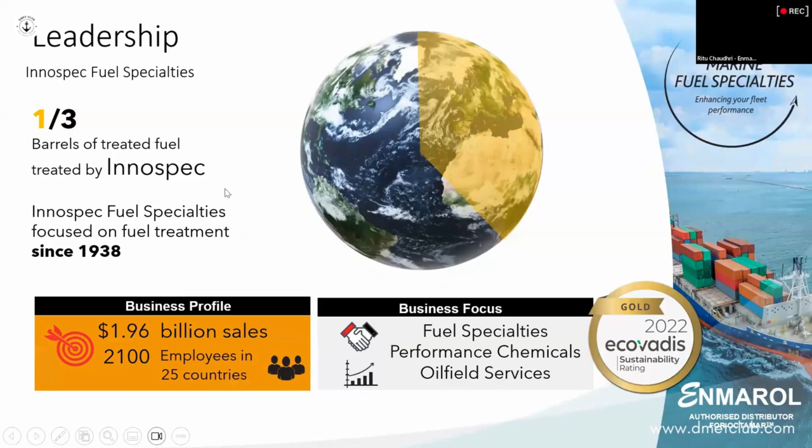Because of our in-depth technology and strong R&D, we are invited to be, and we are, on the ISO 8217 Marine Advisory Board. We work with CIMAC, and we are on the fuel board, on the fuel group. Lloyd's works very closely with us. Class NK has said that they will always work with us because we have the technology and we really know how to address the issues.

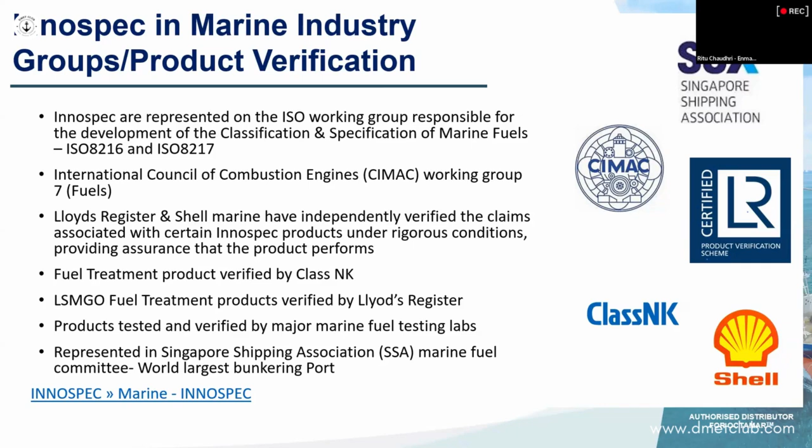You're not selling a product, you are selling us a technology, and we give free technical advice to all our customers. He said, you are giving us a solution. Whenever we have an issue, we write to you and you always address the issue for us.

So I want to thank you for your patience, and for the opportunity to present to your esteemed group of DMET students. So thanks a lot, and if you have any questions, it would be a pleasure to take them.